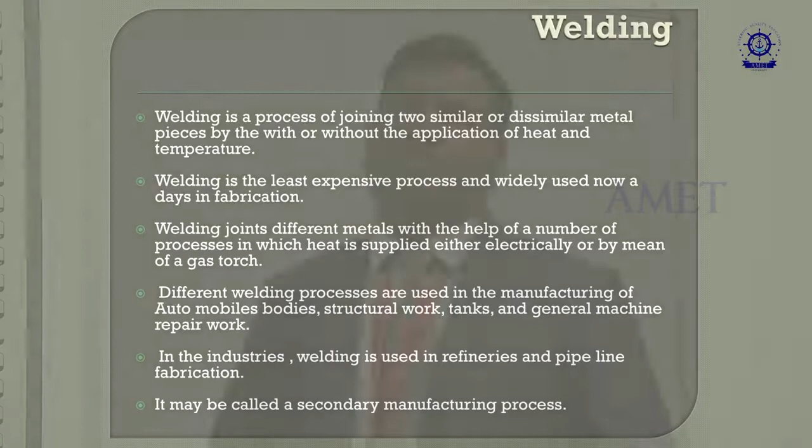As I already discussed, it is a very least expensive process and widely used these days in fabrication. Welding joins different metals with the help of a number of processes.

Sometimes, as I discussed, heat is applied either electrically or by means of a gas torch or by means of a welding torch. Different welding processes are used in manufacturing of automobiles today, starting from gas welding, starting from arc welding, and nowadays there is a lot of advancement in welding taking place in automobile industries, nuclear industries, shipbuilding industries and space shuttle industries, which we will be discussing in this lecture.

Nowadays industries especially use welding processes like friction welding and friction stir welding, and mainly ultrasonic welding, which are used in different oil industries and piping industries. It is one of the largest and major secondary manufacturing processes.

If you consider the classification of welding processes, welding is majorly classified into 35 different welding and brazing processes, and several joining processes like soldering are methods used in different industries.

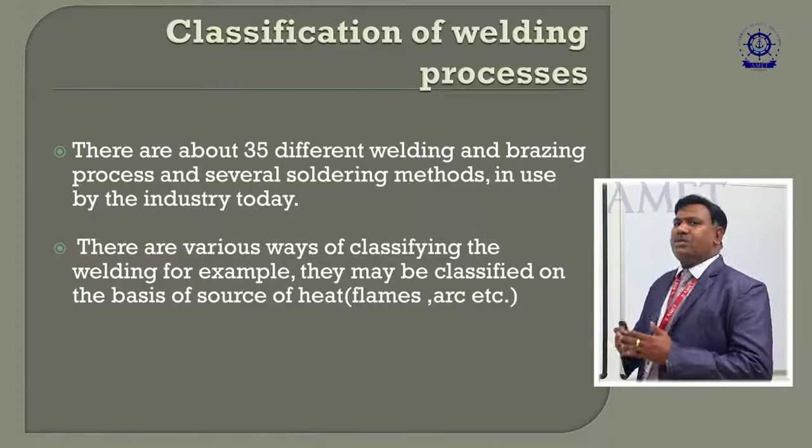There are various ways of classifying welding. For example, they may be classified on the basis of heat sources which are applied. I already discussed that there is flame welding and arc welding which will be used for industries. In general, there are different welding processes, which I discussed.

Gas welding is one of the major classification systems. We have air acetylene and we have oxyacetylene, we have oxyhydrogen welding, and even separate oxygen and acetylene put together in the welding process, and we have different flames which we can get by mixing oxygen with acetylene gases.

Another major classification in welding is arc welding. So we have different arc welding processes. Let us see one by one - these are the major arc welding processes used in industries.

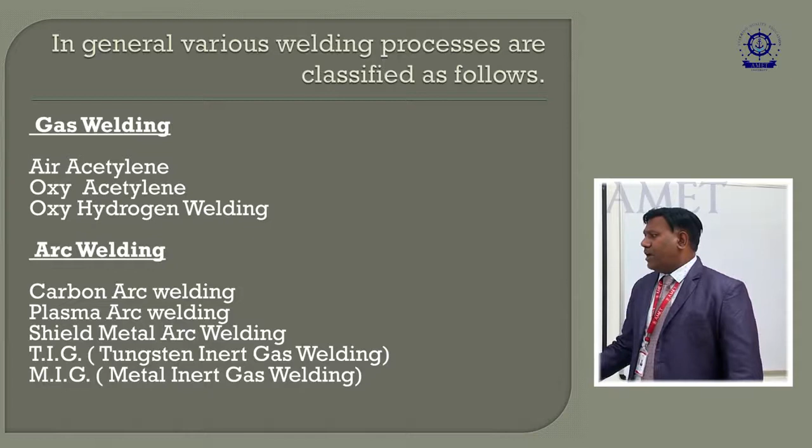For example, carbon arc welding and plasma arc welding, shielded metal arc welding and TIG welding. TIG stands for tungsten inert gas welding and MIG stands for metal inert gas welding. These two processes are widely used in different industries and joining of different non-ferrous alloys too.

Next we have a major classification of resistance welding. Resistance welding comes under the category of pressure welding, and we have spot welding, seam welding and projection welding, resistance butt welding and flash butt welding.

These weldings are used in automobile industries, especially for example automobile door industries, in car door panels - spot welding is used there.

The next major classification of welding process is called solid state welding. This solid state welding is nowadays used widely in all major industries. For example, we have cold welding, and diffusion welding is one of the latest welding processes in which the joining of different types of non-ferrous alloys and ferrous materials as well as plastics and other materials can also be joined.

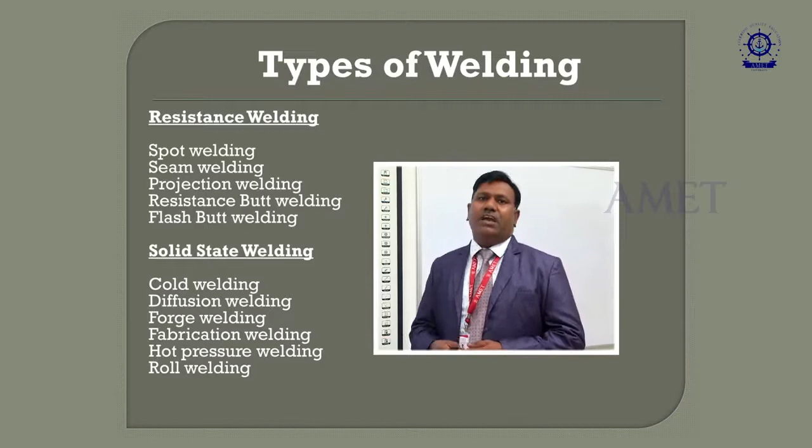Forge welding is one of the other types, and fabrication welding, hot pressure welding and roll welding - and especially today we are going to discuss friction stir welding. Let us see the other major classification of welding, which is very unique and can be considered a special welding process.

For example, we have thermochemical welding, in which thermite welding and atomic welding are the two types. Thermite welding is used in joining railway tracks. You might have seen men working under the railway tracks making a weld with a cone shape where aluminum oxide is put together and fused. The heavy section can be fused and joined together by the thermite welding process.

Another welding classification is radiant energy welding, with two major types: electron beam welding and laser beam welding. These two types are very important in industries nowadays, because laser beam welding can weld even very thin section plates together with very little thickness. Other applications of laser beam welding that you might already know include different medical applications, human surgery, and other things.

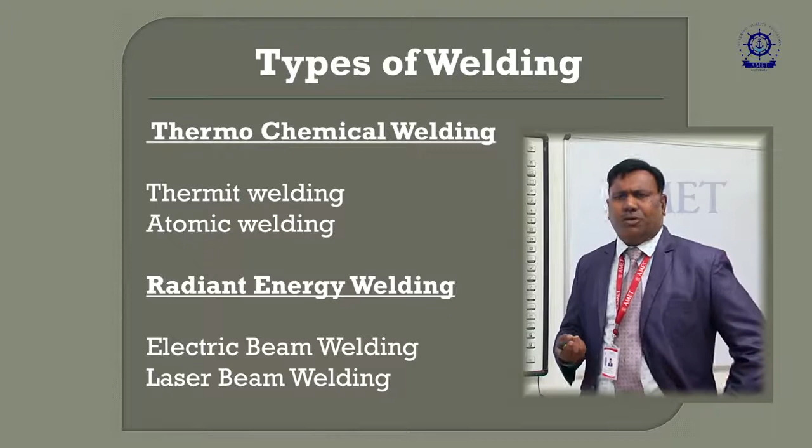We will see the different welding joints used nowadays in industries. We have different welding joints. For example, in normal butt welding we put the two plates together and make a weld. It's a normal welding used in different industries, and it is a major type of welding joint.

And we have a lap joint. What is a lap joint? A lap joint is nothing but making two workpieces, one over the other. This is called the lap joint, which is used in industries.

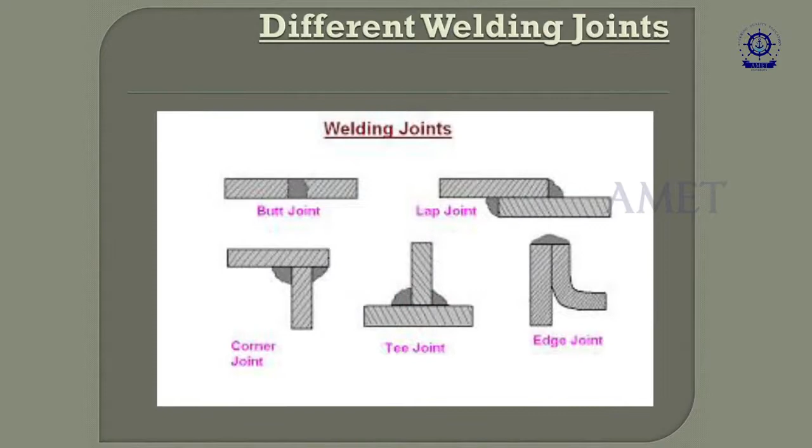And we have a corner joint. For example, if you put the joint together and make a weld over this corner, then it is called a corner joint. And what is a T joint? A T joint is nothing but this T-shaped structure, which is welded in many manufacturing applications.

And edge joint, which I already told you, the position is like this, and this can be called an edge joint. So these are some of the few joints used in industries. There are other types of joints also used, but we have seen only a limited number in our presentation as of now. Next I am going to discuss the different welding positions.

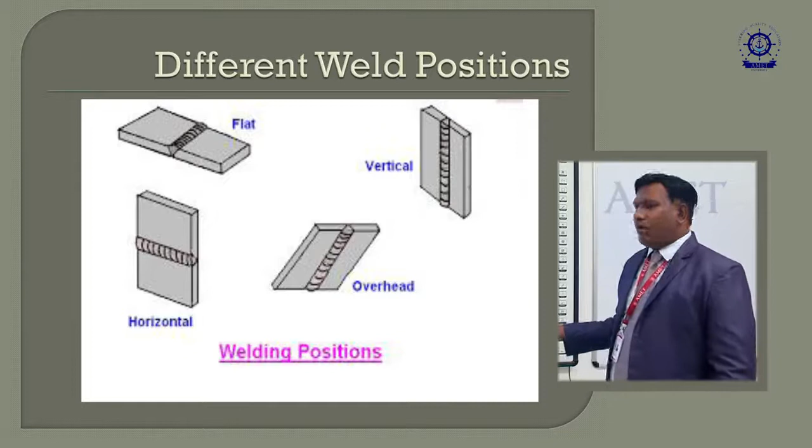We have a third position called horizontal welding, where the welding starts from here and you move the torch from this place to that place. So this is called horizontal welding. In some rare cases we use overhead welding, where the operator has to weld on the top position of the structure, which is called overhead welding. So these are all the different types of welding positions.

Now I am going to discuss forge or pressure welding, summarized together. We have this forge or pressure welding classification. What does it mean? It means pressure welding which does not require any additional filler material. For example, there are two major types: pressure welding is classified into heat created by welding, and cold pressure welding. Cold pressure welding is a separate topic, where without heat you can make the weld, whereas heat is created by a different process in pressure welding.

For example, blacksmith fire, electric current, and friction welding. Blacksmith fire is a very basic type of welding process, where a blacksmith forges the material and makes the weld. And the second one is the electric current method.

In the electric current method, there's a different classification that comes under pressure welding, called the resistance welding process, which we already discussed: spot welding, seam welding, projection welding, upset butt welding, flash butt welding, and percussion welding. Spot welding is making a spot here and there to weld, for example making a tack on an automobile door panel.

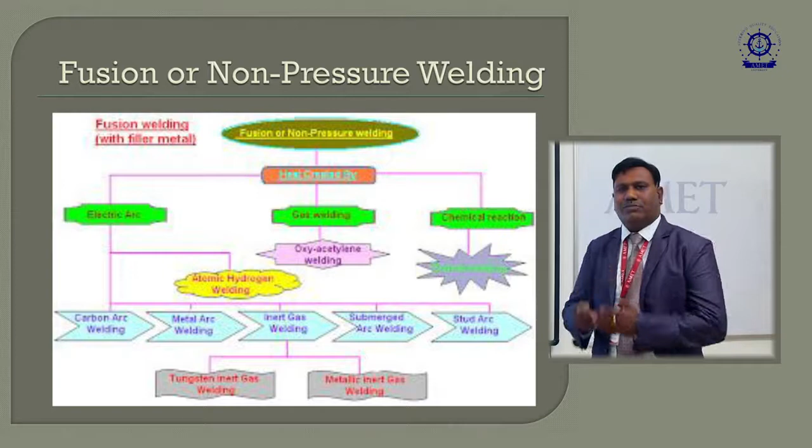Now we come to the main topic of friction stir welding. So far we've discussed the basic types of welding and the traditional classification process used in industries. But nowadays there have been a lot of improvements in welding, such as ultrasonic welding and diffusion bonding, which are promising areas that industries are looking into.

This is important because you can join material without filler rod, and it's an eco-friendly welding process where you don't face any arc glare, dust, or flames. There's no flame at all. It's purely eco-friendly, like a machining process where the tool penetrates into the workpiece and joining takes place.

Friction stir welding is a solid state welding process, meaning it doesn't reach melting temperature. Below the melting temperature, the joining takes place, which is called solid state welding, using a non-consumable tool. We don't use a consumable electrode to join the workpieces, and without melting the workpiece you can join the material. Heat is generated by friction between the rotating tool and the workpiece material, which softens the region near the FSW tool.

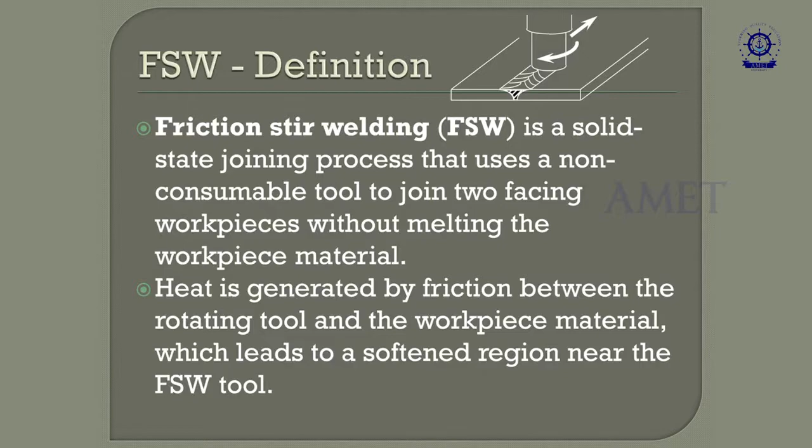For example, consider two workpieces and a tool. We rotate the tool and penetrate into the workpiece, then the tool moves slowly to make the joint over the workpiece—this is called friction stir welding. With this process, you can weld different combinations of alloys, even if the melting temperatures of the parent materials differ. Industries are trying different material combinations, such as joining aluminum with copper, steel with aluminum and copper, and various composite alloys are now used for joining materials.

People are also trying the joining of polymers. Polymer is very difficult to join because there is no proper technique available for joining polymers. So friction stir welding and diffusion bonding techniques are very useful for joining polymer materials.

So we will see what is friction stir welding. It is capable of joining aluminum alloys, copper, titanium alloys. Titanium alloy is a very hard material that can be joined even in this friction stir welding process, and also mild steel, stainless steel, and magnesium alloys.

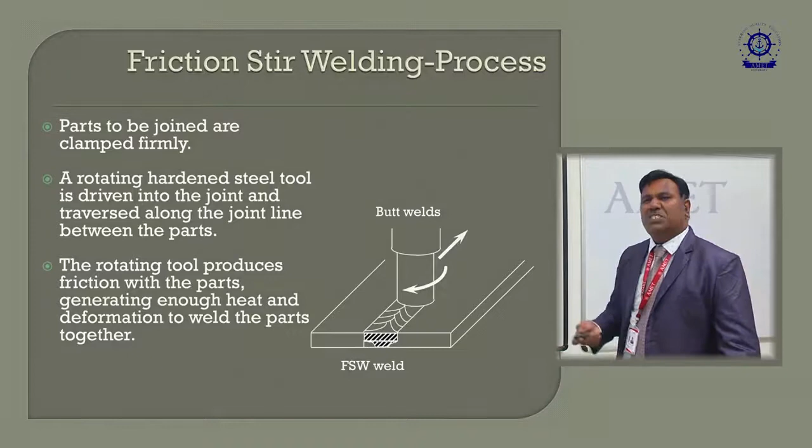As I discussed already, these are the 4 stages into which the friction stir welding clamping method is classified. In step 1, we have the clamping method, where the tool is inserted over the workpiece here.

In step 2, the tool is rotated, and a pull-down force, called an axial force, is applied over the material slightly while rotating. In step 3, we have full penetration of the tool pin over the workpiece with the help of the rotating movement itself.

In the last step, you have full rotation of the tool as well as the traverse feed given on the table, so that the tool moves slowly over the workpiece material, completing the weld. The working principle of FSW involves cylindrical tool surfaces.

For example, this is the cylindrical surface of the tool which makes the weld. A shouldered tool with a profiled probe is rotated and slowly plunged into the joint line between the pieces butted together, so frictional heat is generated between the wear-resistant welding tool and the material of the workpieces.

So we have different parts. This is called the shoulder region, and this part of the weld is called the advancing side. When the tool rotates in the clockwise direction, we consider this section as the advancing side and this side as the retreating side of the weld.

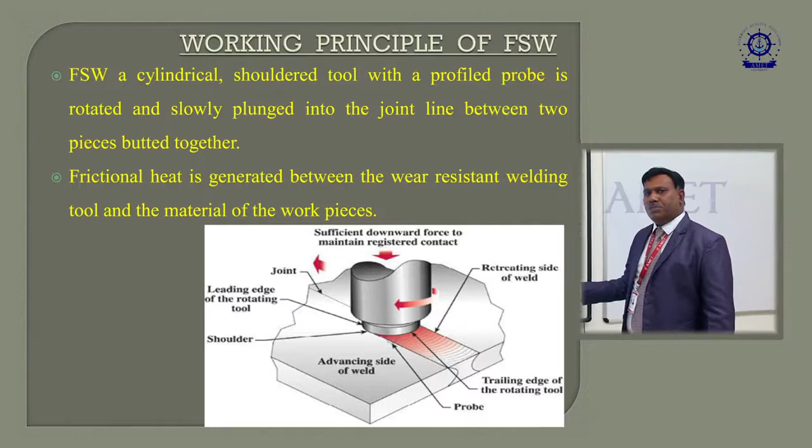We have trailing edges of the rotating tool, where the tool fully penetrates over the material surfaces. This is called the tool probe, and the leading edge of the rotating tool is where the joint is made. Sufficient downward force to maintain pressure of the tool on the material is also called the axial load of the weld, which can be measured.

The heating is produced without reaching the melting point, which is called the solid state welding process, and this allows traversing of the tool along the weld line.

Next, under pressure, the plasticized material is transferred from the front edge of the tool to the back edge of the tool probe, and it is forged by the intimate contact of the tool shoulder and pin profile. So in friction stir welding, the shoulder diameter as well as the tool pin profile are very important.

Suppose you are taking a 5 mm thickness of plate, you need to have a 4.8 mm thickness tool pin, which will be used for stirring the two metal pieces for joining. The tool shoulder must touch the top surfaces of the workpiece, so that a penetration or impression of the tool shoulder is placed over the material and the joining takes place.

In the final section we will see two videos of the friction stir welding process. These are the main parts of the friction stir welding process. The tool is rotated in the clockwise direction and welding takes place on the base metal. There are different zones observed after welding, since the material is not fused together—it is not a fusion welding, but you have different regions that can be observed.

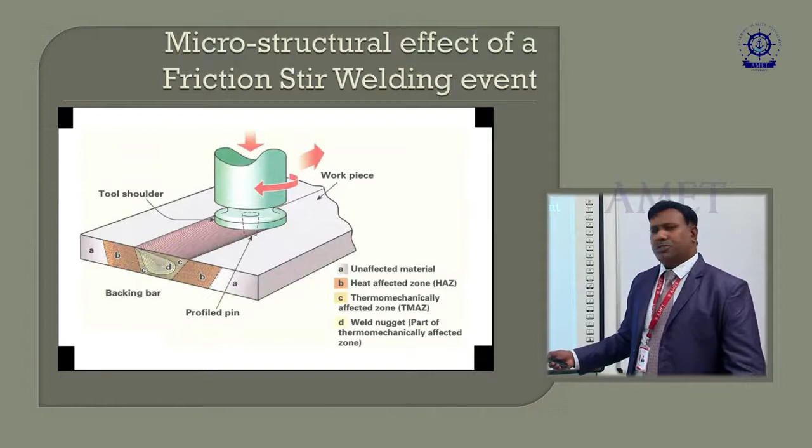In the investigation of microstructure analysis, both macro and micro analysis, this region is taken into account for the result—how the weld is, whether there are any cracks or defects affecting the region, or any changes in the grain structure, such as a fine grain structure, that can be analyzed over this material.

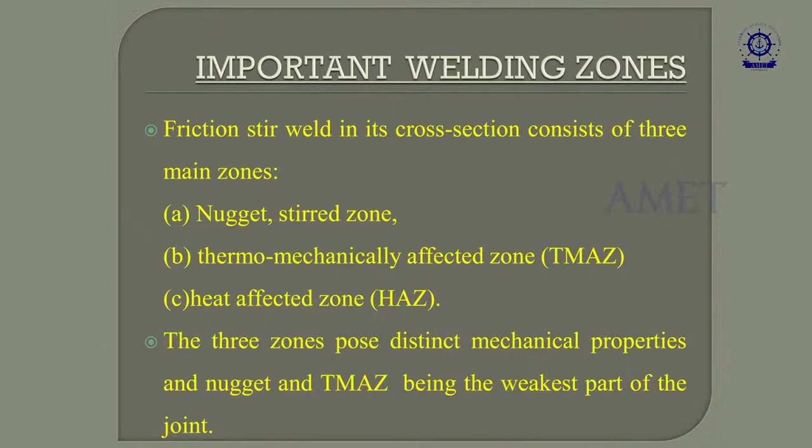So these are the four regions in which friction stir welding can be analyzed, and the main zones we discussed earlier in the diagram: the nugget zone, also called the stirring zone because the tool stirs over the material here, the thermomechanically affected zone, and the heat affected zone—three zones discussed in this region.

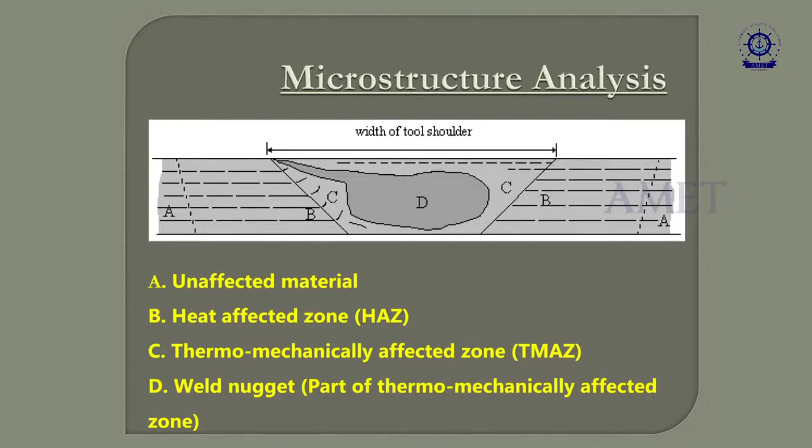This is another type of diagram showing how the welding zone or welding microstructure analysis can be done, and this is the microstructure analysis of the welding. Here, micrographs of different regions like A, B, C of the stir nugget can be viewed, and the factors affecting the different types of weld quality depend on the type of weld.

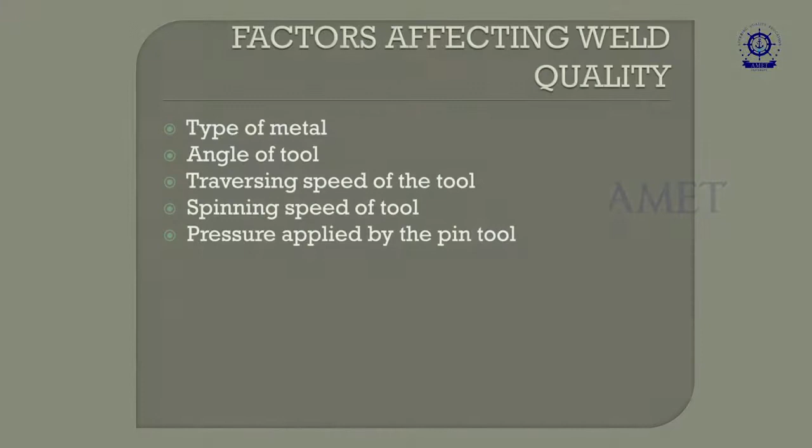The type of base alloy material used is important, and the angle of the tool is also very important—sometimes a tilt angle is used and sometimes it is not. The traversing speed of the tool, which can be considered the rotational speed, the spinning speed of the tool, that is the rotational direction of the tool, and the pressure applied by the pin tool, normally called the axial load.

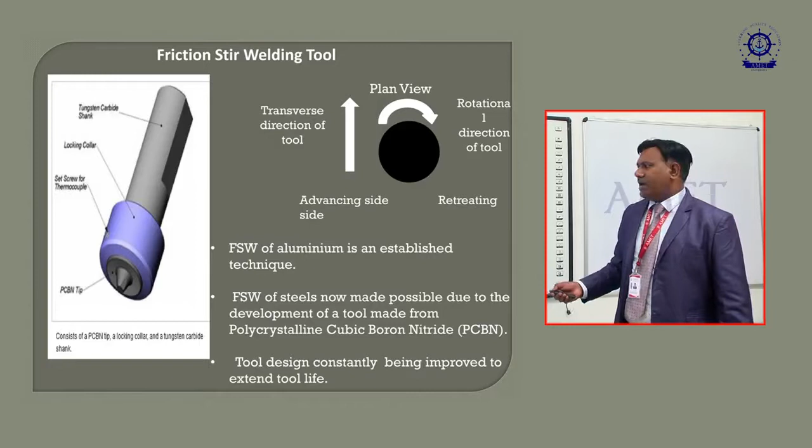Nowadays, aluminum alloy is used for the major joining process of this welding, and friction stir welding of steel is now made possible due to the development of tools made from polycrystalline cubic boron nitride, which I discussed as PCBN, with tool design constantly being improved to extend the tool life. We also have mild steel, but sometimes very hard workpieces or very hard base alloys require tool pins like diamond-tipped or PCBN tools for making the joint.

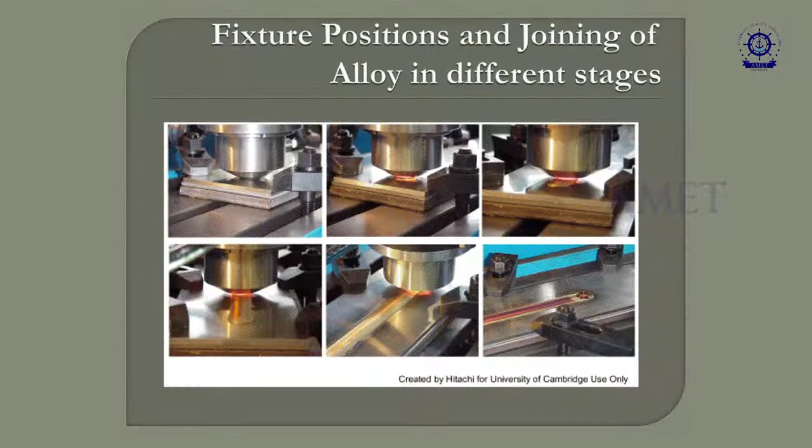So next is the fixture position, which I discussed already. These are the different fixture positions in which the tool rotates over the metal pieces or base alloys, and these are the different pieces. See, here you have a red hot condition of the joining process, but it is not a fusion process in which the material gets fused together. It reaches below the melting temperature, and the joining takes place over the different regions of the material.

And we have this alloy, this is the welded workpiece of aluminum alloy after the weld.

And the tool parameters, we have different parameters of the tool in which the tool will be designed. Say for example, length of the tool and pin profile, what type of thread you are giving, whether it is cylindrically profiled or circular type or cylindrical type tapered with threaded pin profile, what type of profile is needed, square and hexagonal as well as pentagonal tool or square type of profile. We used to test it with different tool profiles, to see what will be the strength of the weld.

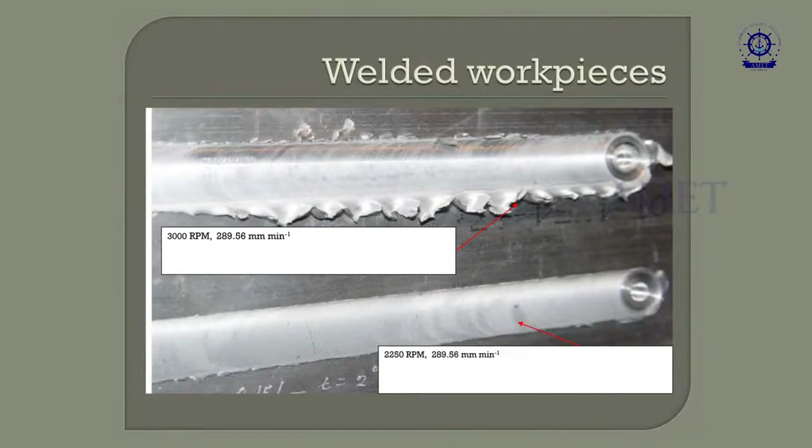The tool is strong enough, hard wearing at welding temperature, has good oxidation resistance and thermal conductivity. These are all the different features of tool material, and the hardness is selected based upon the type of base alloys that you are going to weld.

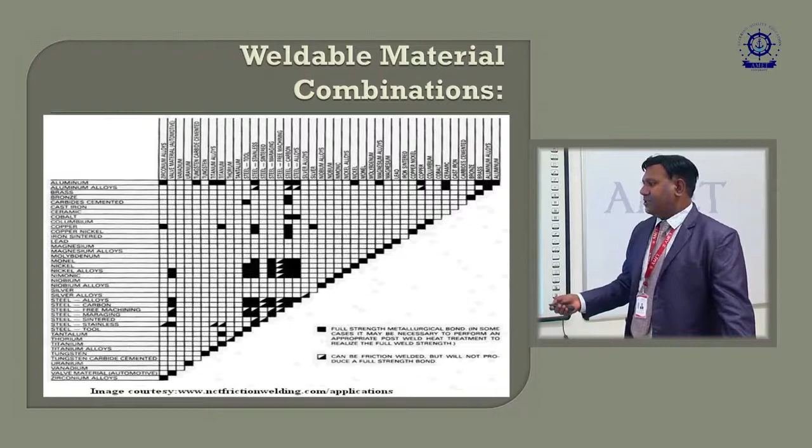But in our country we have a limitation over the joint, since we do not have that much advanced facilities like what other countries are having, and those countries have very advanced and sophisticated robotic machines for joining friction stir welding parts, like used in different rails and different shipbuilding structures and other applications.

We have the material suitability as we discussed earlier through the chart. We can make copper and its alloy, lead based alloy, titanium and its alloy, magnesium alloy, zinc, plastics that can be joined in this process, and then mild steel, stainless steel, nickel alloys and different types of polymers, that is also possible.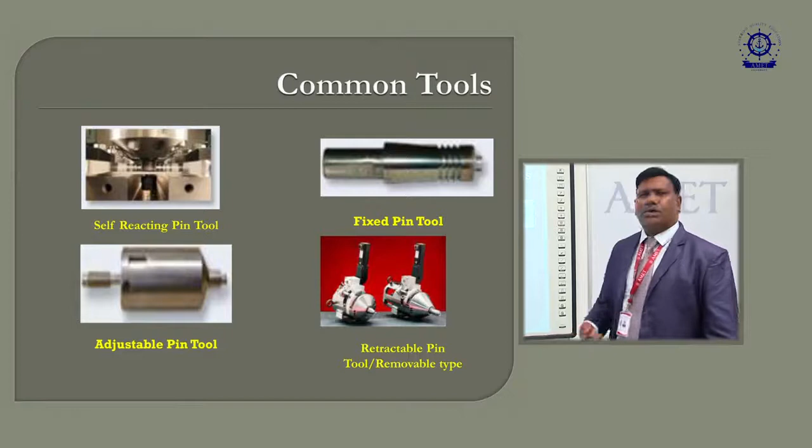This is a self reacting pin tool, and this is a fixed pin tool, and this is an adjustable pin tool, and this is a retractable pin tool. So these are all the advanced types of tools which can be used in friction stir welding.

And here this is the friction stir welding machine used by ESAB, the company called ESAB. They are using a SuperStir TM machine, FW28, and here there is one more machine also called ESAB machine, which has a very big structure and can be used for heavy sections also.

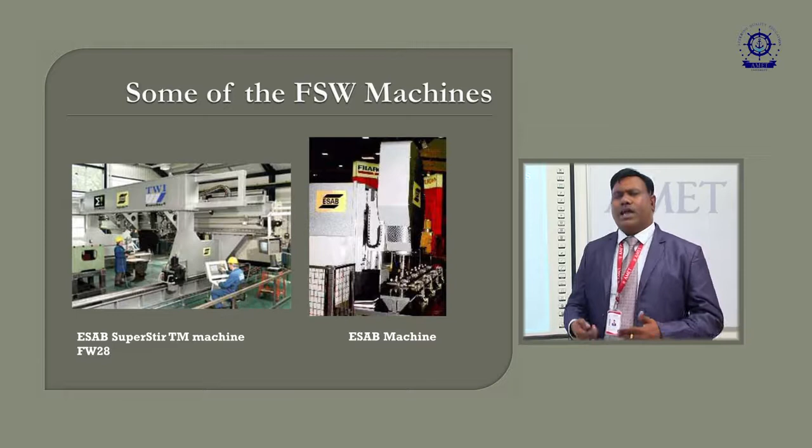And next we have a general example of what normally people are using nowadays for research purposes. So this is one of the friction stir welding machines used for college purposes, and this is the normal welding tool, and this is the welded parts, and these are the different tool profiles we discussed earlier, and this is the tensile strength material that is cut from this base alloy using the ASTM standard, and can be used for checking the mechanical properties of the material.

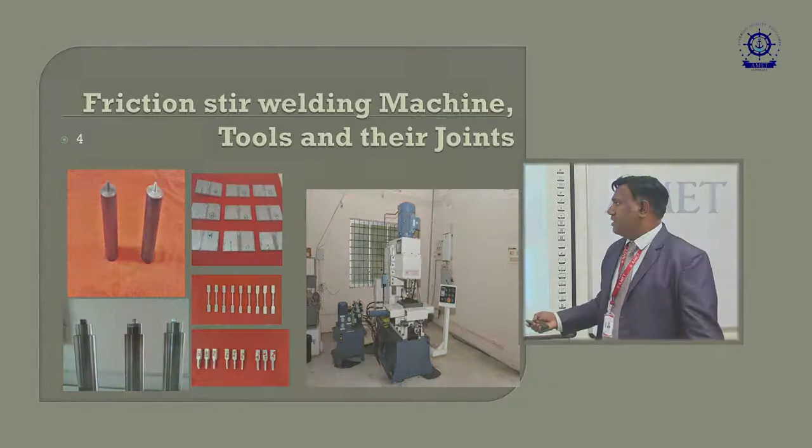So we have polypropylene and magnesium alloy plates joined by friction stir welding as shown in the figure. Here the plastic material, polypropylene, has been joined over this process, and here this is the aluminum alloy joined by friction stir welding process, and this waviness has come due to improper selection of the process parameters.

And here we have two magnesium plates joined over this process. See here some of the burr that has been left out over the friction process, and here you have a very good joint that can be made over this process.

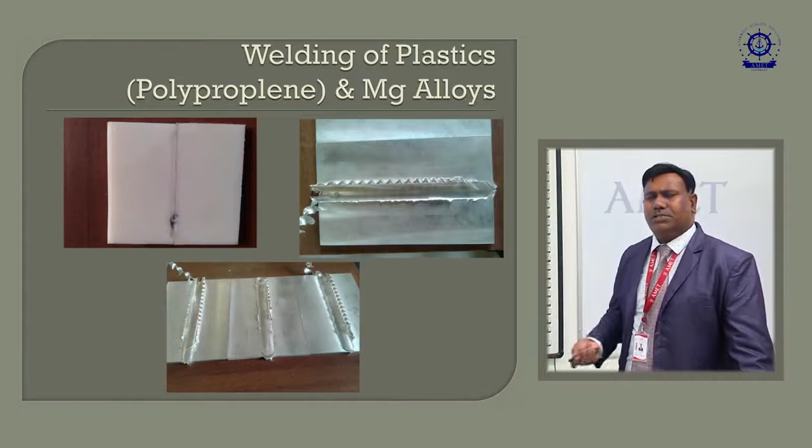So these are all the other combination alloys, like aluminum to copper, and this is magnesium. Again here the combination of aluminum alloy to the copper material that can be joined.

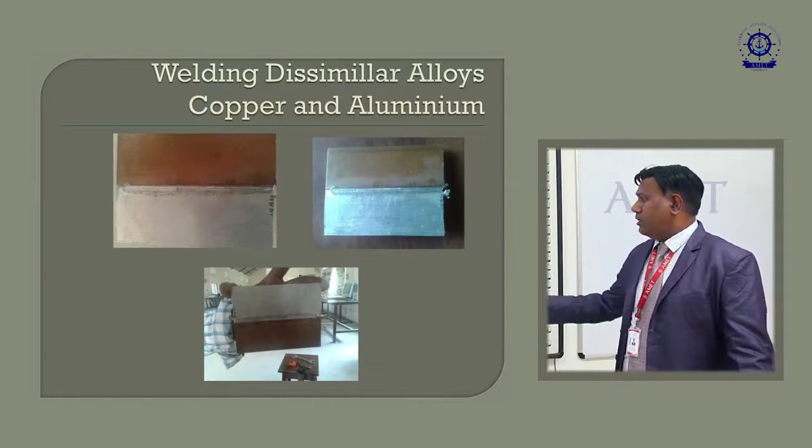So we have the current uses of friction stir welding machines: aerospace, railway, shipbuilding, and construction industries and others. And when we compare with moving to lightweight alloys, we have aluminum, magnesium, plastics, and even composite materials that can be used. I discussed this as an eco welding process, and its main area of use is shipbuilding.

For example, friction stir welding was used to fabricate the aluminum panels of the superliner at Mitsubishi Engineering and Shipbuilding, and this can be used even in the SpaceX factory.

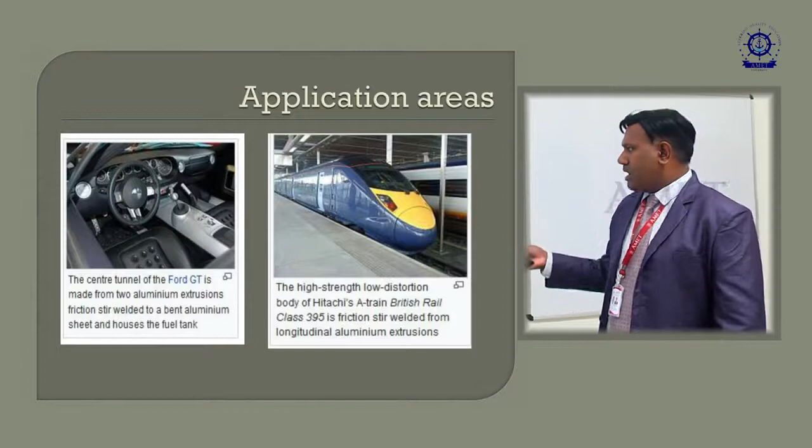Ford company uses this particular welding process in their cars, and this is the high strength low distortion body of the Hitachi A-train British Rail Class 395, which uses the friction stir welding process.

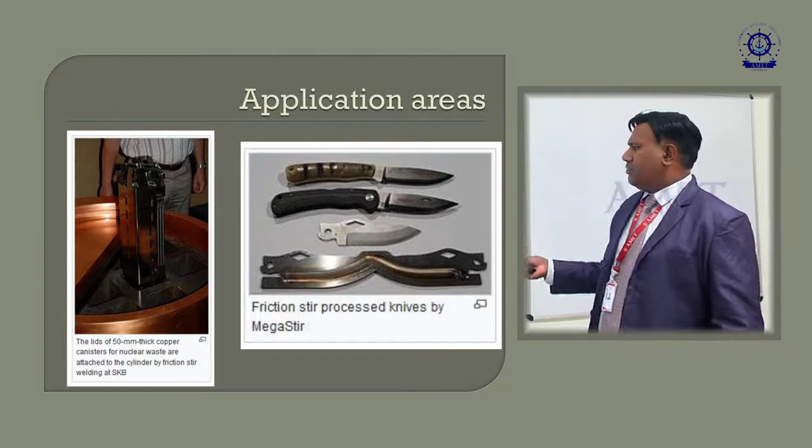And here this is the 50 mm thick copper canister for nuclear waste attached to the cylinder by friction stir welding, and this is one of the interesting applications in which the friction stir process is used by MegaStir.

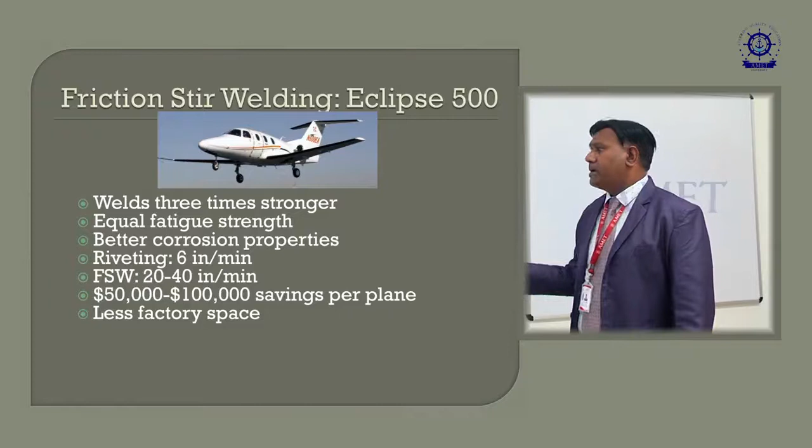And Eclipse 500 also uses friction stir welding. The advantage of this welding is it welds 3 times stronger with equal fatigue strength and better corrosion properties. Riveting achieves 6 inches per minute, but with FSW we have 20 to 40 inches per minute, and the cost savings are almost $50,000 per plane when manufactured through this friction stir welding process.

Space Shuttle utilizes this friction stir welding process, and Boeing made a 15 million dollar investment in friction stir welding over the last 2 years.

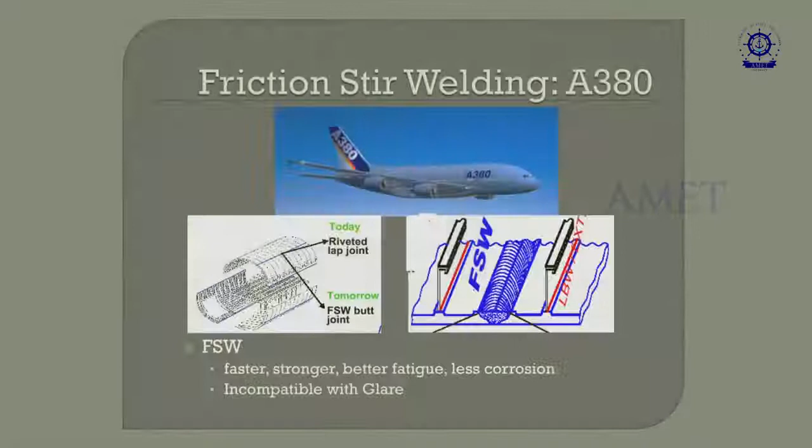And we have friction stir welding used on the Airbus A380. They use friction stir welding machines which are faster, stronger, with better fatigue resistance, less corrosion, and incompatibility with Glare. So today we are using the riveting process, and tomorrow we will use the friction stir welding process in a larger way.

So friction stir welding is used even in robotics also. KUKA Robot Group has adapted its KR500-3MT heavy duty robot for friction stir welding. The DeltaN FS tool is used, and the system made its first public appearance at the Euroblech show in November 2012.

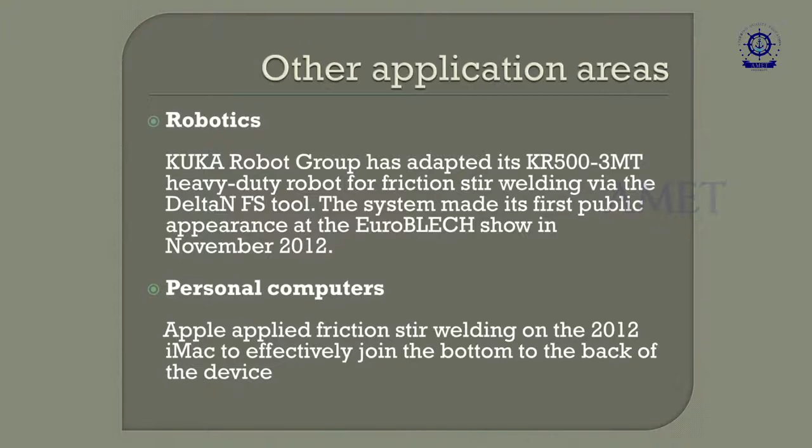And even in personal computers, Apple applied friction stir welding on the 2012 iMac to effectively join the bottom to the back of the device. This process is used, and we will see two videos of friction stir welding, and then we will conclude this lecture.

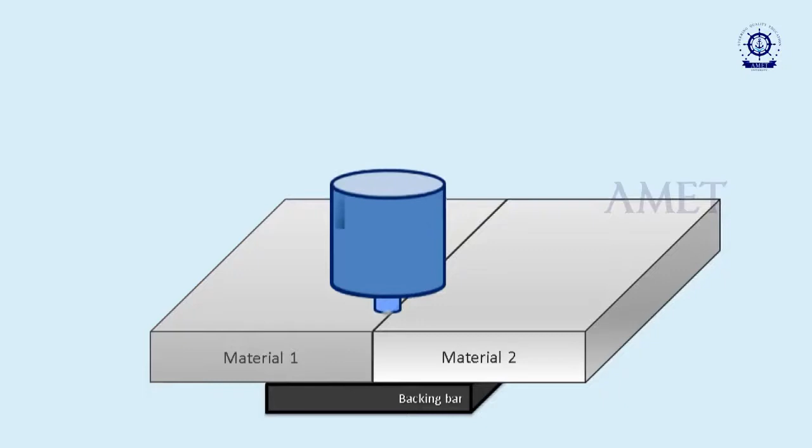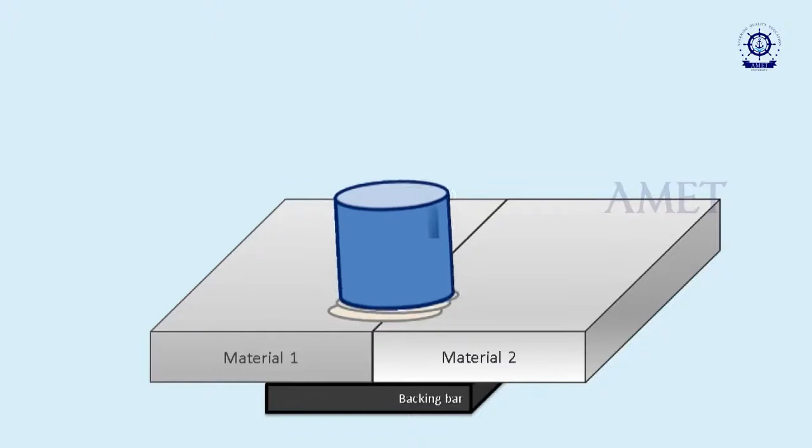In this process, the tool is penetrated over the workpiece surfaces, and we have a stirring action by the tool, and at last the tool will be retracted from the material. This is the process, or stages, of friction stir welding.